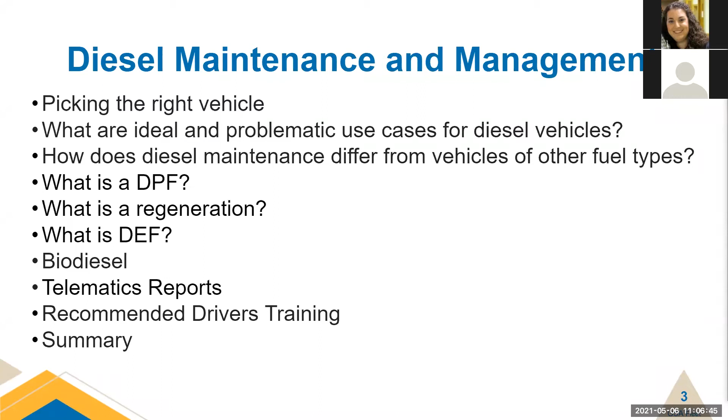Now I'm going to hand it off to John Hampson to discuss vehicle selection. Thank you, Justin. Good morning, everyone, and thanks for attending. Some of the follow-up slides will go into more detail, but I'll just get into some of the basics here: picking the right vehicle.

In particular here, we're talking about some of the light-duty shuttle buses, some of the vocationals, and some of the pickups, and in some cases, even some of the medium vehicles as well. Diesel engines have always been more efficient and still are, but some of the challenges with diesel engines are becoming a little more apparent with the exhaust treatments as of about the last 10 years or so.

And we're also at a time when we have some very, very fascinating, very powerful gasoline engines. The Ford 7.3 liter is an example of an engine that compares very well with diesel in a lot of cases. So regarding efficiency, use that to your advantage.

If you have a vehicle that's covering a lot of miles, in particular pulls a lot, you can take advantage of it. Also, with the higher mileage, you're also going to have higher life expectancies. So if you're putting 20,000 miles on a vehicle a year, 30,000 miles a year, particularly in a bus or something like that, diesel is still the way to go.

In particular, as we mentioned, we're talking about campus environments where gasoline, in a lot of cases, is going to start making more sense. Diesel engines also offer better torque, particularly at low RPM, and turbo diesels don't have the loss in horsepower and torque as they increase in elevation.

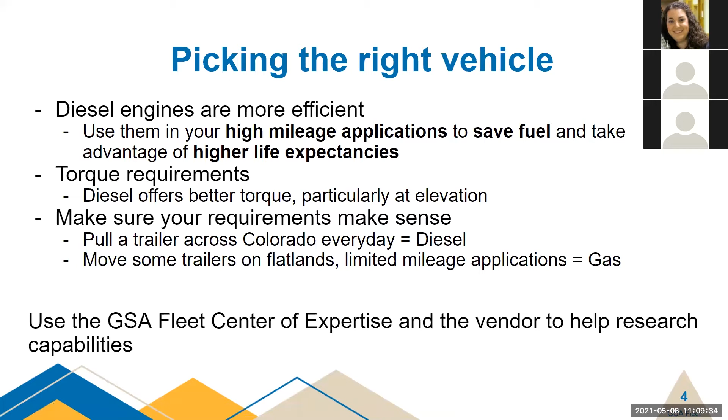Appreciate it. To diesel or not to diesel, that is the question.

In the past, the diesel engine was the best solution for most all applications to do with larger vehicles. In fact, in the late 1970s and early 1980s, we had a mix of gasoline and diesel engines in buses and trucks. To make them more efficient, the change to diesel was sweeping. Everything went to diesel. Now's the time to consider avoiding diesel if you can. It seems like we're turning back the clock, but as things change, we must change with them.

So what are the reasons to use a diesel engine? Yes, diesel is the most efficient and power generating fuel you can find. You can always get more torque out of the same cubic inch as a diesel engine compared to all other fuel types. And torque is what gets you moving, not horsepower. The more torque, the more weight you can move. But the applications where diesel makes sense are getting fewer and fewer.

In vehicles greater than 35,000 pounds GVW, you have no choice but to use a diesel. You will need to be smart about how you handle them and not allow the exhaust after-treatment to get clogged up with ash. There will be a supply of gaseous fuel and even electric powertrains available on the market, but nothing will meet the efficiency of a diesel.

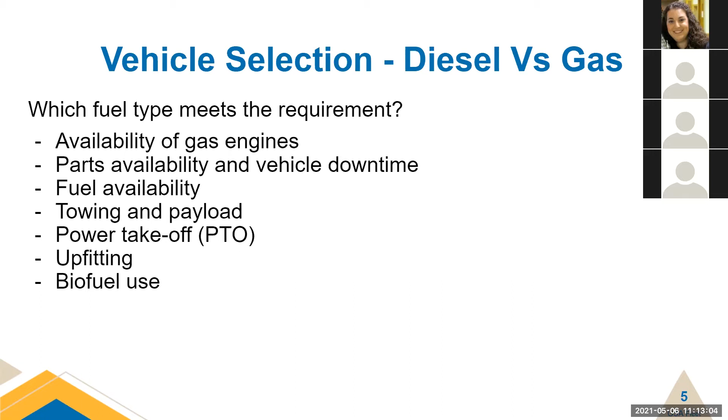But with all the benefits of diesel, there are some severe problems with doing things the way we used to. Some old bad habits just won't go away, and the biggest one is idling. No engine should be allowed to idle more than 5 minutes without moving, but a diesel is particularly vulnerable to this bad habit. The diesel engine is basically a big air pump. To keep it simple, there is no restriction to the airflow going through the engine, unlike a gasoline engine. Since there's no restriction to the airflow, the diesel only provides enough fuel to keep the engine turning, and that does not produce enough heat to keep the DPF clean.

So idling, especially in cold weather, is a mistake. The more it idles, the colder it gets. It is more efficient to shut the engine off for 10 minutes after driving than to leave it idling. If you need heat in the cab and that's the only reason you're running the engine, you can use a fuel-fired heater system instead of idling. This type of heater will also keep the engine at full operating temperature, which the engine itself cannot do.

The second biggest problem with operating a diesel is not operating at road speeds high enough to passively purge the ash buildup in the exhaust. If you don't achieve a road speed of at least 40 miles per hour for 40 minutes or more, you will never properly purge the exhaust. Likewise, you need high road speeds and time when the engine is going through an active regeneration. Failure to drive on highway frequently will end up costing you downtime and repair expenses to clean up the exhaust at the repair shop.

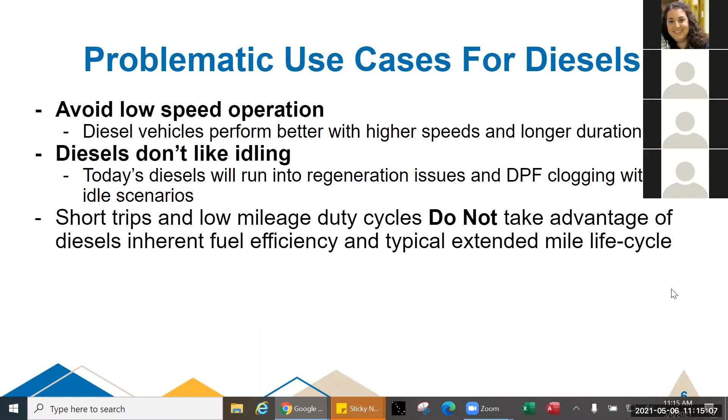Thank you, Peter. Now we're going to be transitioning to maintaining the diesel vehicles. If your requirement led you to a diesel, or you already have a diesel fleet, you can expect some differences in maintaining the vehicles compared to other fuel types.

One of the most obvious ones with diesel maintenance is the cost. Additionally, for the preventive maintenance, diesel engines do hold more oil. On the positive, this means you can have more miles between PM intervals. Downside is if you don't drive the vehicle as much, you're typically paying more per PM for the oil change.

Another thing with the preventive maintenance, the fuel filters are regularly replaced on diesel vehicles. And the exhaust systems require regular maintenance, and we'll be highlighting the driver's responsibilities for that maintenance later in the brief.

And then for the engine parts, typically these are higher cost and lower availability, which brings us into the point of vendor service. Currently, industry is experiencing a shortage of qualified diesel technicians, which adds to the downtime for vehicles and has led to higher hourly rates going back into cost. This may not affect all localities though.

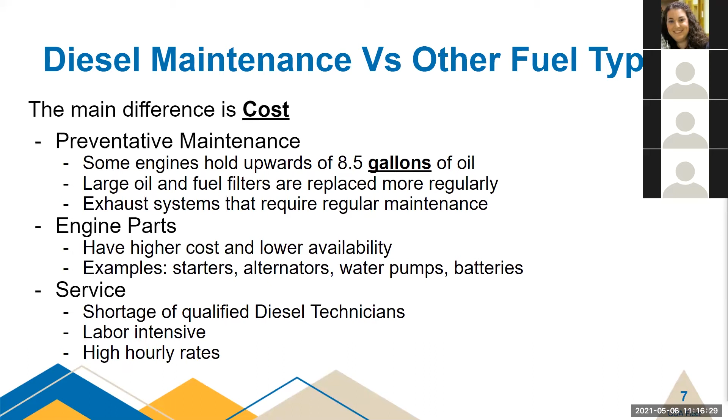Diesels will also have additional or more extensive systems than other fuel types. Typically these are exhaust related, such as the EGR, exhaust gas recirculation. They tend to have the larger turbo systems, as well as the larger fuel filtration system.

Additionally, you do have the diesel particulate filter, DPF, and the diesel exhaust fluid, DEF systems, which we'll be focusing on. All of these systems, they're going to add to the maintenance and care of the vehicle, and they can also increase your downtime and cost if not properly taken care of.

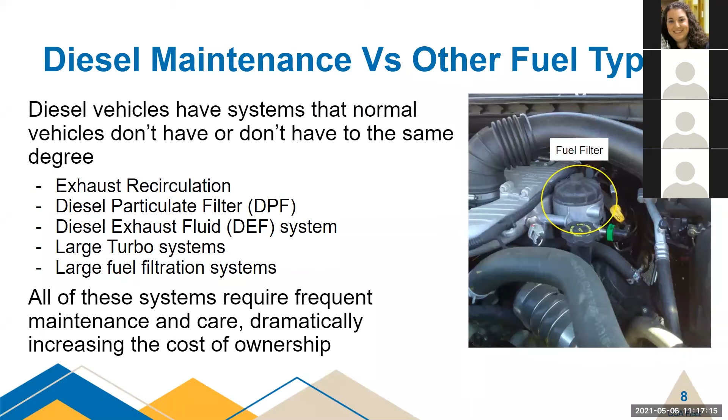So we've already tossed around the term DPF a few times today, but a diesel particulate filter, or DPF, is a filter that was added to diesel vehicles after a 2007 EPA ruling to lower carbon emissions from diesel vehicles. Essentially, it just traps and stores exhaust particulates, being the soot and the ash.

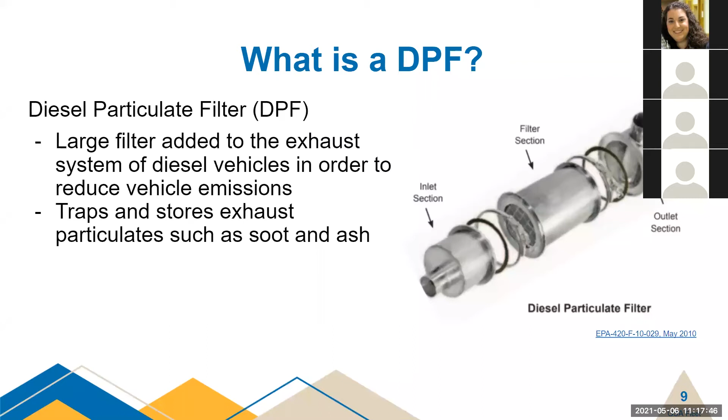The soot captured by the diesel particulate filter system can be cleaned through a process called regeneration. This will be done routinely, and the driver will be involved in this process. Before we cover the types of regeneration, there are two key points, and Peter's already touched on this earlier today.

The low speed usage will not produce the heat required to regenerate or burn off the soot. And once the DPF becomes clogged, it'll cause poor system performance and can even shut down the vehicle.

This is caused by exhaust back pressure. The exhaust can't escape. This ends up lowering the power output, lowers your fuel efficiency, and also over time, if this is a recurring event, it can lead to additional wear and tear on parts. And to protect itself, the ECM will shut down the engine if the DPF becomes too clogged.

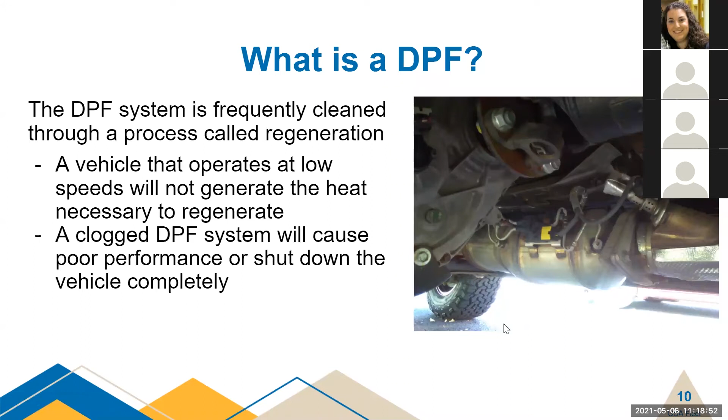So there are multiple types of regeneration. They all result in the same thing: the soot is burned off. As a note, there's also going to be ash that'll be trapped in the diesel particulate filter. This is the non-burnable material.

Eventually, this is going to have to be removed from the DPF. It'll be physically cleaned, and OEMs generally put DPF maintenance at over 100,000 miles for ideal use. And when they're saying ideal use, they're talking about higher mileage applications.

So our first step of regeneration, and the preferred, is the passive regeneration. A simple definition of this: the vehicle's operation is producing enough heat for the chemical reaction to turn the soot into carbon dioxide to escape the filter. Most people simplify this more and just say you're burning off the soot.

Benefits of a passive regeneration: there's no additional action by the driver, and it's more common for long haul, highway type driving, or driving with a heavy load for a prolonged duration. The vehicle's use case generates the heat to burn off the soot.

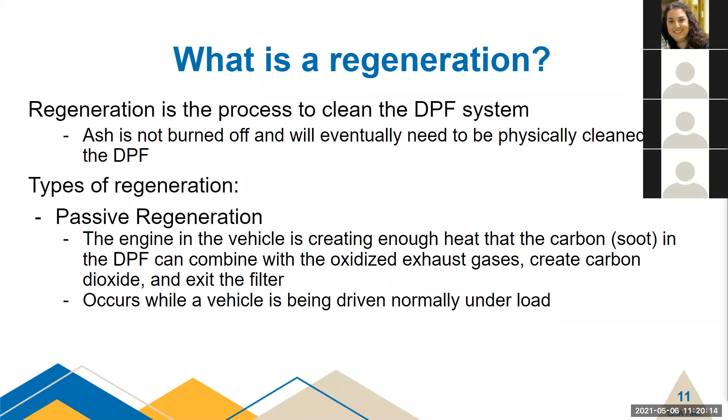Our next type of regeneration is called an active regeneration. This will occur when the engine is not creating the heat needed for passive regenerations. So to create the heat, fuel is injected into the exhaust stream to raise the temperature and burn off the soot.

The vehicle's ECM will trigger the active regeneration based on the soot level in the DPF. Additionally, most ECMs also have some form of speed threshold to start an active regeneration. A common one for buses would be 40 miles per hour. It's recommended to check the owner's manual for the specific requirements for an active regeneration on your vehicle.

From the driver's perspective, with both passive and active regenerations, those generally occur without their knowledge. On some vehicles, the driver may notice that during an active regeneration, a high exhaust temperature warning light turns on, and sometimes they may also notice the smell of burning rubber. And if they're checking the MPG during active regenerations, there's generally a drop in MPG since fuel is required to perform an active regen.

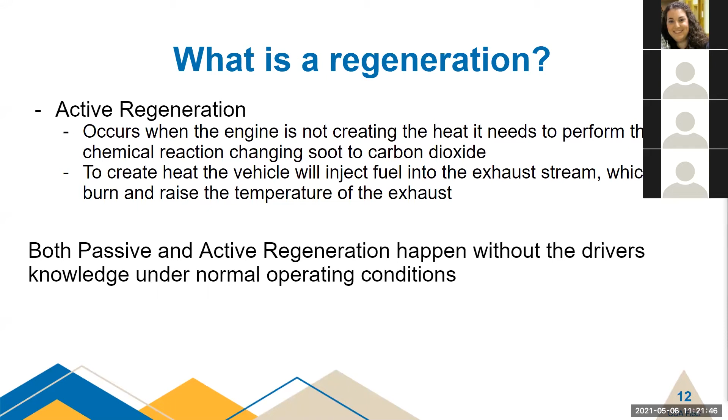For vehicles that don't meet the conditions for passive or active regenerations, the vehicle may have the option to perform parked or manual regenerations. This feature is not available on all vehicles, or it may require selecting the option during the acquisition process.

If your vehicle does allow for parked regenerations, this generally takes 20 to 60 minutes. It does vary depending on the soot level, and it also varies on how the parked regen is started. Some OEMs have a dash control, and sometimes the switch to start a parked regen is somewhere else on the vehicle. So again, you do have to check your owner's manual for performing a parked regeneration.

As a safety note, this applies to all types of regenerations. The regeneration produces a lot of heat, and when you have the vehicle parked to perform a parked regeneration, please make sure it's away from other vehicles and away from combustible material. It can cause fire or damage if things are behind the exhaust during the regeneration process. It does produce temperatures of around 1,000 degrees.

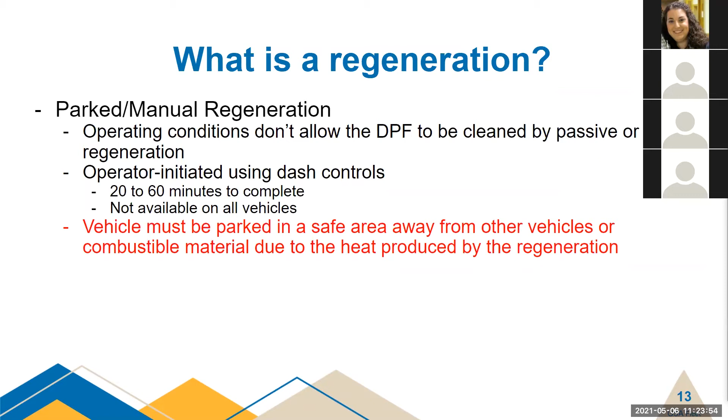Our last option for regenerations, and the least preferred, is a forced regeneration, sometimes called a shop regen. It should only be used when all other forms of regeneration fail. Essentially, it's just a parked regen, but a shop technician uses a computer to force the regeneration process. You can expect costs of around $150 on average. Depending on locality, it may be twice this amount or more. You also have to plan 45 to 90 minutes for the technician to perform the forced regen.

Usually the need for a forced regen is because the active and parked regens weren't being performed, causing the vehicle to go into limp mode at 5 miles per hour, or to shut down the engine due to how clogged the DPF became. Sometimes a forced regeneration will fail to clean the DPF. At this point, the DPF needs to be removed and either physically cleaned or replaced.

I'm checking one of the questions in the Q&A box, and I'm going to answer that one live. The question was: what if special circumstances prevent diesel vehicles from being driven off base or at high speeds to clear the EGR? What can the customer do? We did answer that with our stationary or parked regens. The thing to ask there would be, when you're acquiring vehicles, check with your FSR to make sure you're selecting the proper option for the feature that allows for parked regens. That way you can just flip a switch and in 20-60 minutes the regen can be complete.

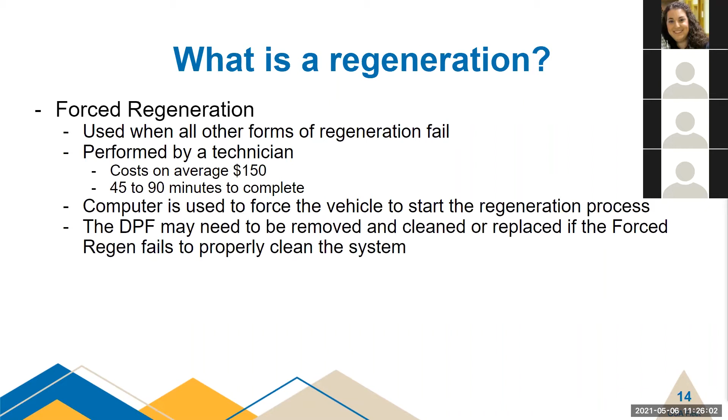As we mentioned, dealing with regens is a driver responsibility. The driver will receive different warning and dash notifications when regenerations are required. Ignoring DPF regen warning lights will eventually result in downtime, possibly being towed to the shop, and possibly getting a new DPF filter or just getting it cleaned, which does result in costs.

Just like with any other incident where drivers did not perform necessary actions for dash warning lights or other dash notifications, the charges incurred will be the financial responsibility of the leasing agency. So we encourage drivers to follow the regen warning lights: if they get the light, do the parked regeneration, or if they have the option to drive it on the highway, do the active regeneration.

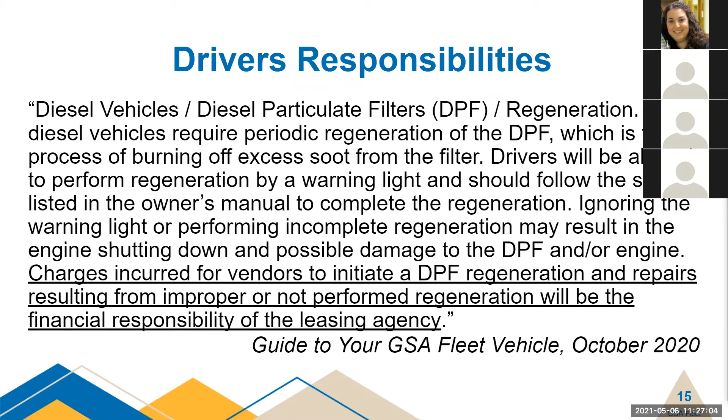Another addition to diesel vehicles to meet emissions requirements was the diesel exhaust fluid system, or DEF system. It's needed to break down NOx emissions in combination with the selective catalytic reduction, SCR technology.

The key points that fleet managers and drivers should know is that it should never come into contact with the diesel fuel. It has its own storage tank, and OEMs generally always label it with a blue filler cap. Just like in the picture to the right, the green cap is for the diesel, the blue cap is for the DEF.

In the event that diesel or DEF are put in the wrong storage tank, drivers should not turn on the vehicle. Please call the MCC number on the back of the fuel card for assistance. Generally, if you mix up the DEF or the diesel, the fluids will need to be flushed from the vehicle.

Drivers will purchase DEF for the vehicle, and they can do that at authorized maintenance vendors or from a fuel station. Some fuel stations sell it in gallon jugs, and some fuel stations also have an actual pump for DEF. Just a reminder, parts stores are not authorized for purchasing DEF, as part of GSA policy.

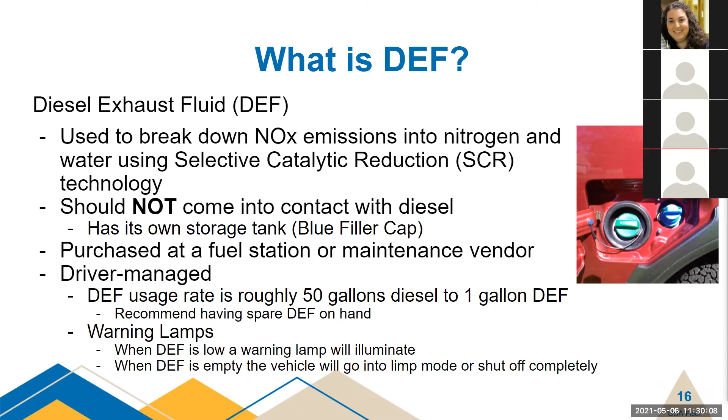Some of you have already mentioned in the Q&A, I haven't been able to see all the questions yet, issues with the regenerations. One of the options that's used to help with dealing with regen issues is actually using biodiesel. Biodiesel reduces the particulate matter, so that means it reduces your regens as well.

Other benefits of biodiesel: you get the AFV credit, and it has the natural lubricity for engine care. Nowadays, almost all diesel vehicles are supported up to B20. If you do have older vehicles or you're unsure, please check your owner's manual for the percent of biodiesel supported by the OEM. That will not void the warranty.

So there are benefits to biodiesel. Also want to explain some of the issues you may run into or have to work around. First one is fuel stability. Biodiesel is less stable than diesel and gasoline, so it is not good for storage. Part of the issue is it's also known for trapping water, which can lead to algae buildup in the fuel lines. Generally, for any storage longer than a month, we recommend not using biodiesel.

For cold temperatures, biodiesel does begin gelling at a higher temperature than diesel and gasoline, so it may not be the best choice in some locations during the winter, or you may need some form of mitigation like a heated garage. This one's a minor point, but for maintenance, you're going to lose about a third of the fuel filter life. But generally, replacing a fuel filter is a lot cheaper than dealing with regen issues.

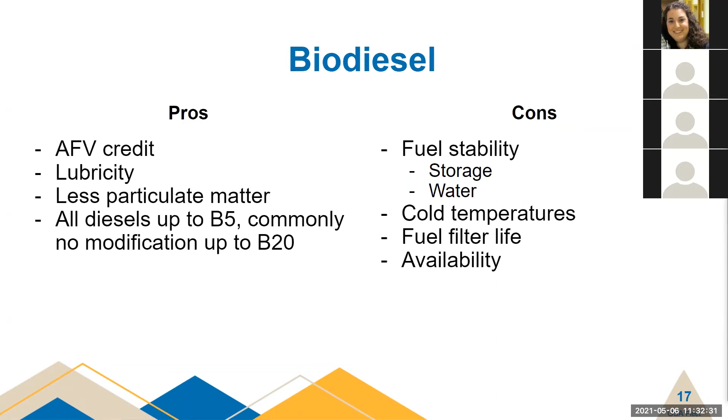We just want to show the drop in particulate matter. What's common would be B20. B20 usually offers over a 10% drop in particulate matter, which translates to less regen requirements. Generally, the higher the percent of biodiesel, the lower the particulate matter, so the less regen requirement you're going to have.

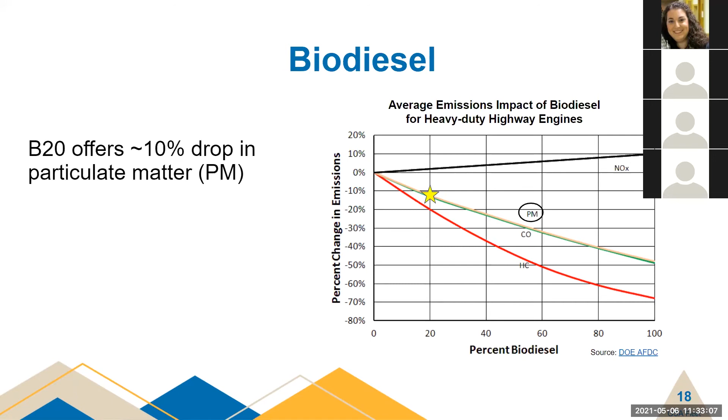Another way to mitigate DPF issues, as well as general diesel and fleet management, is by using telematics. The Geotab platform and devices, which GSA Fleet uses, offer tracking of the diesel exhaust system. You can see everything from the DEF level, the DPF warning lights, and even the soot level for the DPF. You can also check the temperature of the exhaust and more features.

You can also look at the use case of your vehicles individually or for multiple vehicles at a time. Good examples are checking the percentage idling. There's a speed profile which can check vehicles individually to see if they're meeting the conditions for passive or active regenerations, or you can make other reports to check the average and max speed of the vehicles to see if passive or active regenerations would work. This could help you with a mitigation plan to decide if you need the parked regen feature available on your vehicles, or if you'll need that duty cycle rotation plan to send them out on the highway to do active regens.

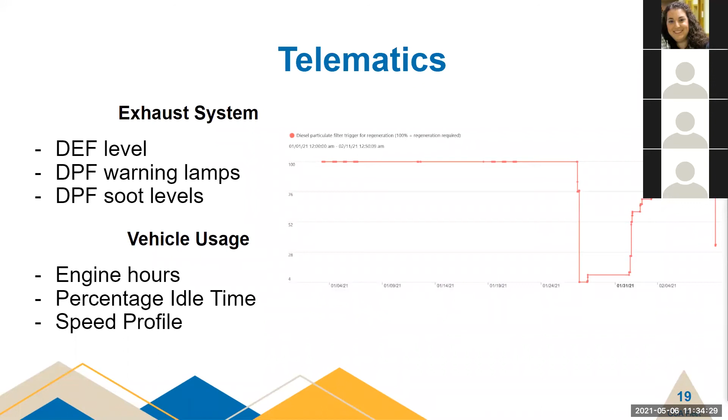So we're going to try to do a quick demo. I'm going to pull up the MyGeotab platform. It's actually already up. If you've never seen it before, this is the MyGeotab platform. This is going to be a very quick demo, not actual training on the platform. We're just going to show you what you can see for the diesel vehicles, and then a few things you can do to help with management.

So we're going to be looking at engine and maintenance first, that's the engine icon. From here, we're going to look at the measurements, that way we can see things like the actual DEF level percentage. We can also see things like the idle time as well. So we're going to go to yesterday.

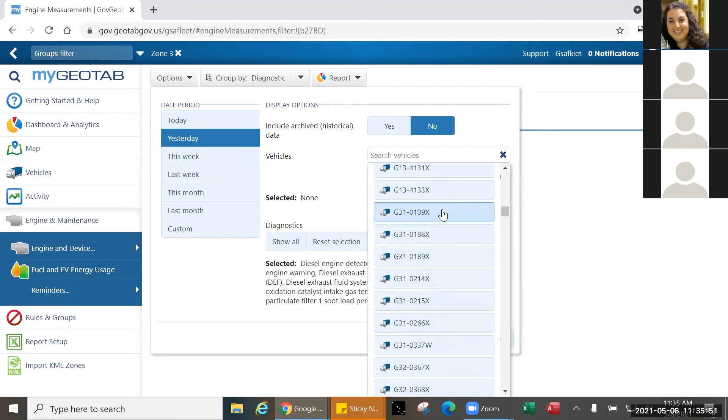Just to show all, or most, of the diesel diagnostics available, I'm going to type in diesel in the search window and select all. I'm also going to go back and add DEF as well. Then we're just going to select a few vehicles, which I know are diesels, to show these diagnostics. So this will take a moment to pull up. If you don't want to view things in the web browser, they do have reports available in Excel or PDF.

While this is loading, generally what I like to use the engine measurements for is just seeing which diagnostics are available on vehicles, and also to see what the data looks like. So to give you an example, we have the DEF level right here for this ambulance. We can check the diesel particulate filter regeneration status when it's going on and off, and whether it's doing active or passive regenerations. On some vehicles there's also a diesel particulate filter trigger for regeneration, if you actually want to try predicting when regenerations are going to occur.

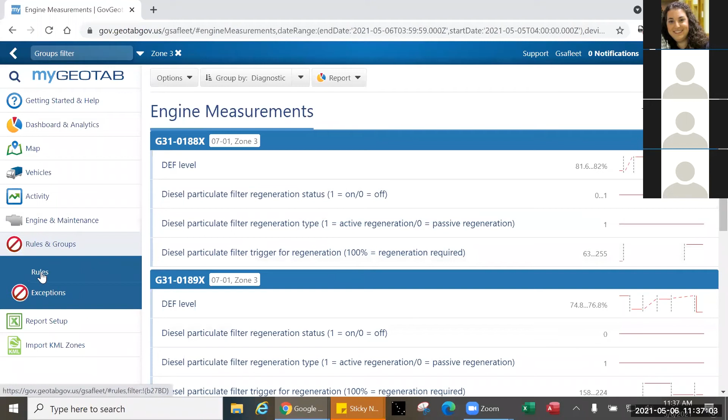So once you know which data you're interested in, from here you can go to rules and groups, and then you can basically make triggers to notify you, as the fleet manager, that there's an issue with one of your vehicles, or that there's something you need to look into. Some of the rules are already built in that'll help you manage diesel vehicles.

If you scroll down to sustainability, they already have fleet idling rules built in. Peter brought up earlier in the brief that idling is not good on modern diesels. In this case, the rule is built in for 20 minutes, so you may want to drop that down to 5 minutes, and you can edit those rules.

So let's say you wanted to make a simple rule, like a low DEF warning. You go to the top, click add, and from here you have only 3 tabs to work with. Let me see if I can zoom in. The name tab lets you just name your rule. Conditions give you a lot of options: you can add different engine diagnostics or faults to get warnings on, add speed thresholds, and you can add AND/OR logic to add in more features.

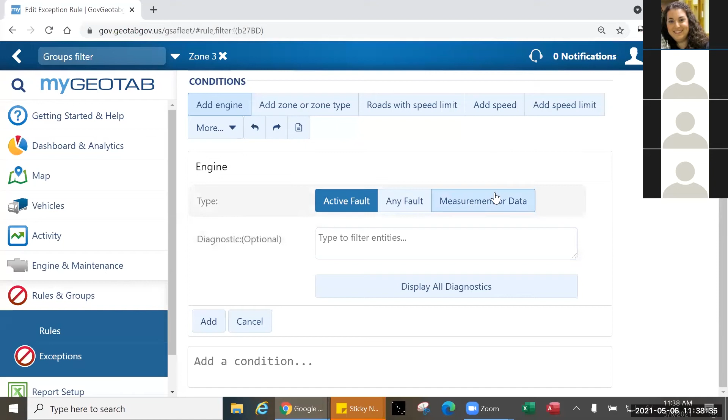So just to quickly make a DEF rule, we go to add engine. From here, when we're looking at engine and maintenance measurements, we're using the measurements, not the faults. We just go to type DEF, which we used earlier, DEF level, and today we'll put under 20%.

Click add. So anytime the vehicles on this database go under 20% for the DEF level, we can set it to get a notification under the notifications tab. Depending on how serious the issue is, if you want to get an email notification every time a vehicle needs a regen, you do have that option, or every time a vehicle is low on DEF.

So you can just type in your email and then you'd be good to go. Depending on how many vehicles you have, you probably won't want to get just an email for every single vehicle, so you can do the exception reports.

The exception reports just let you know when rules break over a period of time. So if we want to see low DEF or idle shutdown timers, we could look over this month at our vehicles and see how often people were breaking an idle shut timer override rule, how often we had low DEF on our vehicles, or how often active regenerations were occurring.